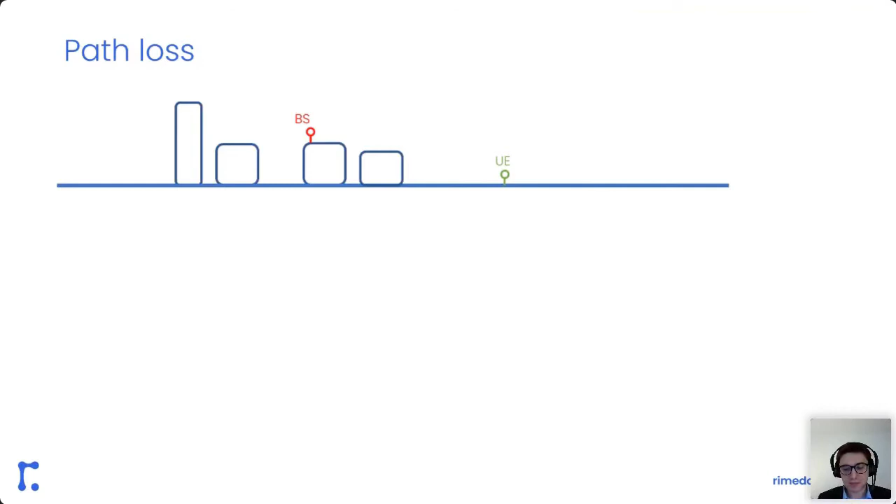Now I would also like to introduce path loss, since maybe not everybody is deeply in the field, and this is pretty important in my talk. So if we consider a base station mounted somewhere and a mobile station, which is user equipment, UE here, then the path loss is simply the difference between the transmitted power and the received power. So it means how much power is lost in the air in the transmission between the transmit antenna and receive antenna. This is the path loss.

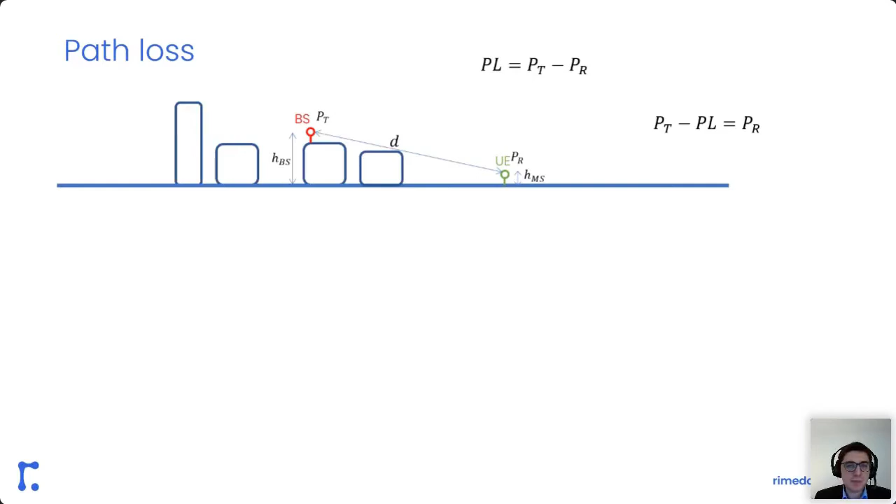And this is important because if you design the network, if you want to check the coverage, or if you want to check the quality of the link for the users, you have to know the transmitted power, and if you know the path loss, then you can simply determine the received power, which is crucial for users.

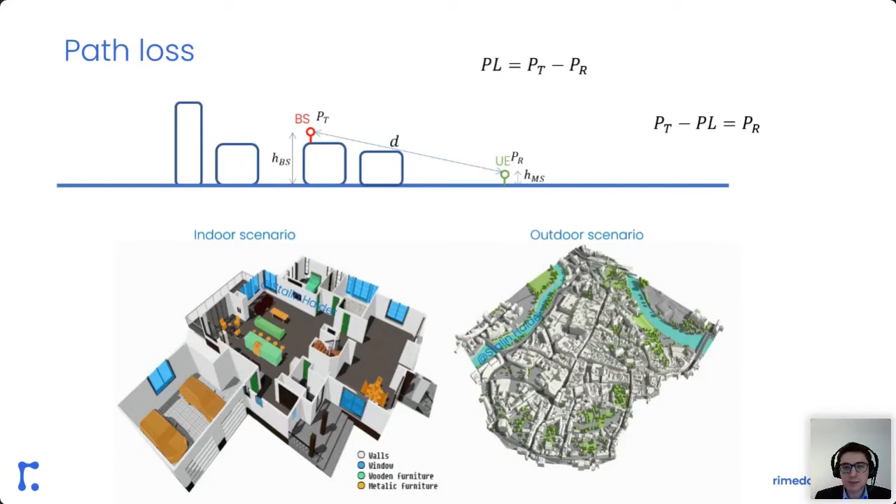And mainly in every case, also in the millimeter wave case, in wireless propagation we have indoor scenario and outdoor scenario. We have also a mixed scenario, which is called outdoor to indoor. In my talk, I will focus on the outdoor scenario in my simulations.

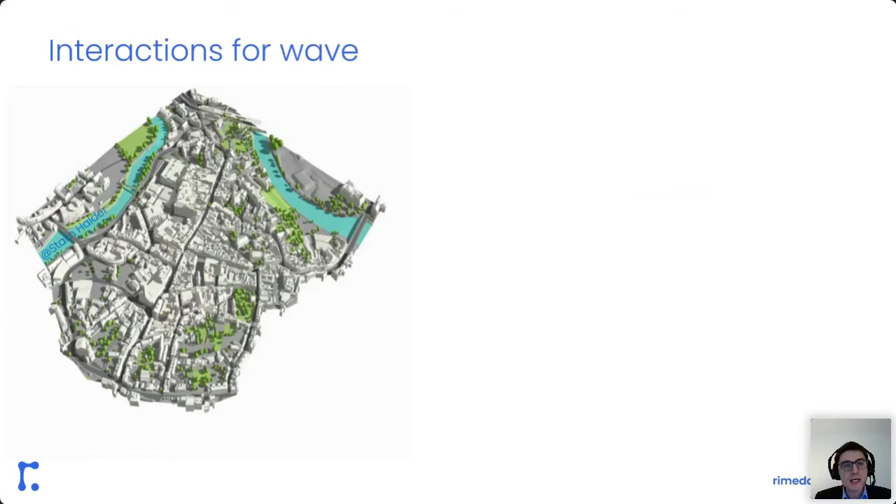So if we consider the base station mounted somewhere in the city, as you could see in the left side of the screen, then you just launch the power, you just transmit the wave. Then you have simply 4 possible interactions for every wave. And the first is the free space propagation, where we have direct transmission between the base station and the user.

Second, we have the reflection and transmission case, where the signal touches the wall, touches the obstacle, the building, and some of the power is reflected and some of the power is transmitted into the building. We call it then the penetration loss or reflection loss.

Third, we also could have the diffraction case, where the signal goes through the wedge, either vertical or horizontal, and then the signal can bend in the wedge, and also some power is lost in that case. However, this is pretty nice, since users which are shadowed, which are not present in the line of sight case, could also be served.

Finally, fourth, we have also scattering, which is the reflection with an angle different from the incident angle. So this could be understood as the case that the wave is coming to the surface, and then because of the surface roughness, it is scattered in another direction, with another scattering angle, and we call it diffuse scattering.

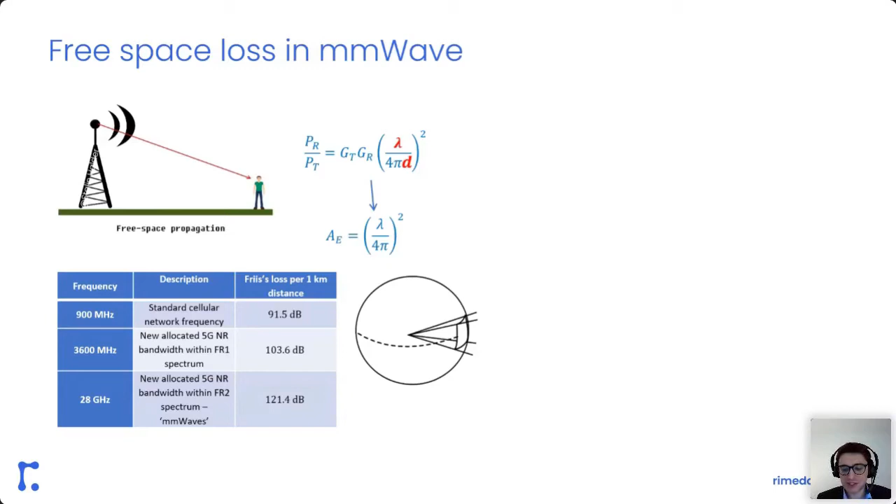And you can see the more elements in the antenna array we use for beamforming, the more narrow the beam is, which means it has greater directivity, which means the user at a given distance will collect a greater amount of power.

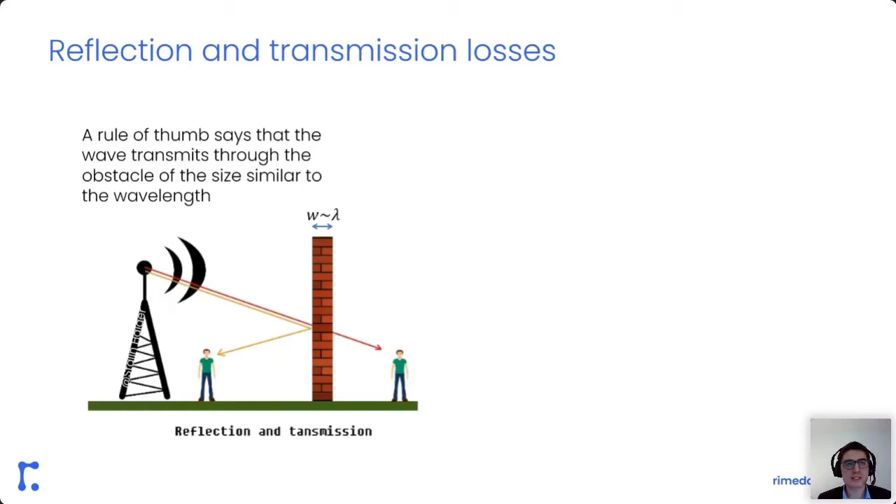Of course, it doesn't mean that if you compare, for example, a 6 gigahertz wave, where lambda is around 5 centimeters, and you transmit through a wall with a width of 5.1 centimeters, then it is blocked, but if the wall is 4.9 centimeters, it goes easily. Of course, it is smoother. However, the rule exists. And if we compare the reflection losses regarding the frequency and also the transmission losses, we could observe the frequency dependence here.

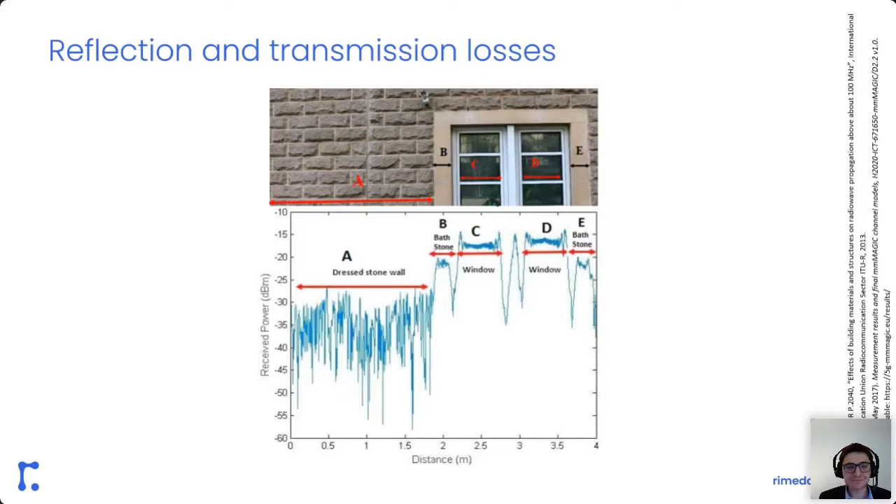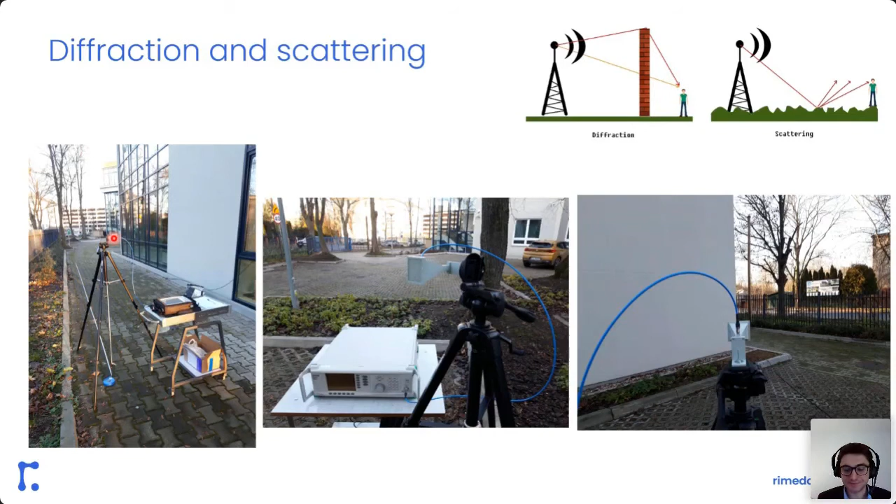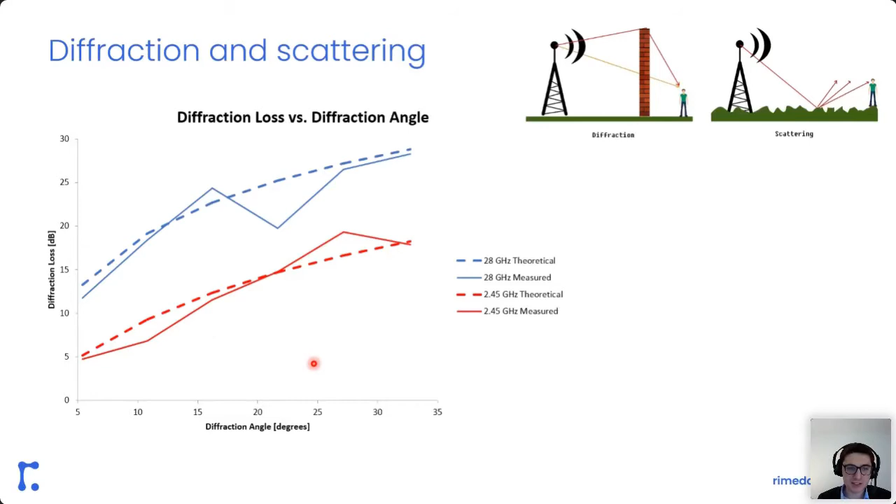However, still, this diffraction loss is not killing propagation in millimeter wave. It is bigger than in sub 6 gigahertz, but it is not killing the case. And just to sum up diffraction, we have a 10 decibel difference. We could model this with a couple of methods. The Deygout method is the theoretical method for diffraction modeling. We also have the quite popular Berg iterative model and the quite detailed, precise UTD, GTD model.

And scattering, which is of great importance in millimeter wave: we shall consider the Rayleigh criterion for surface roughness, since with a millimeter wavelength, a couple of millimeters, we compare the wavelength of the wave with the roughness of the surface. And if they are of similar size, then scattering plays the main role here.

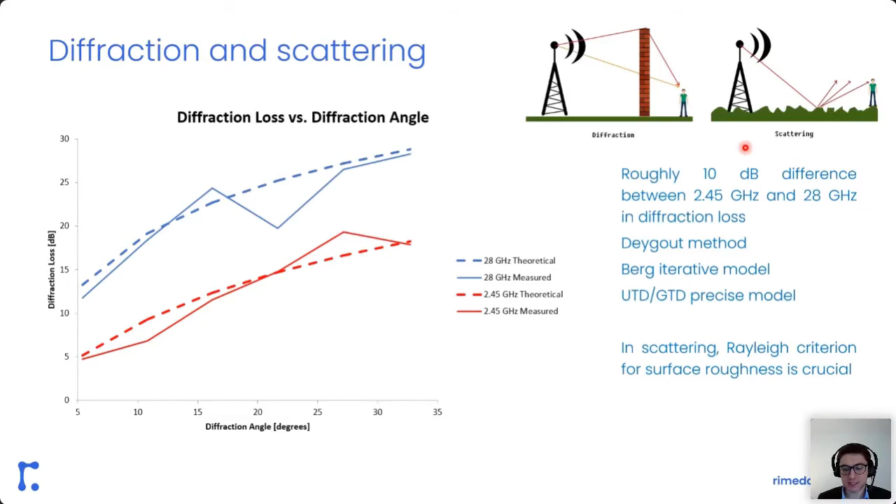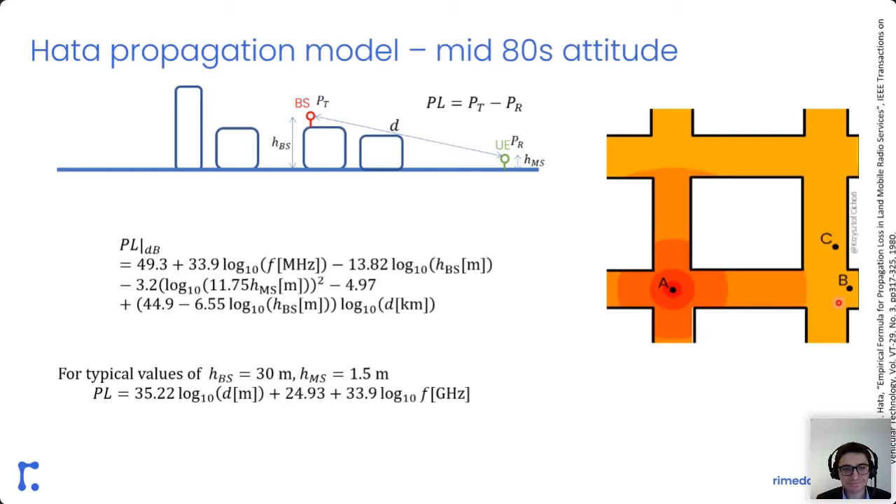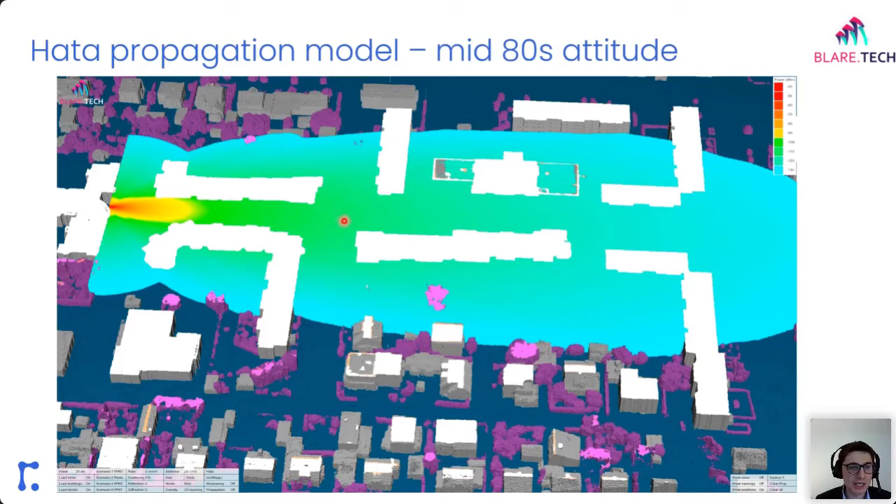And this is the simulation result for our small city in northern Poland, you could remember, according to the HATA model. So irrespective of where we are, if we are in the shadow of the building or in the line of sight, the path loss is similar. And of course, the measurements say the opposite. That can't be true. If you are in the line of sight, the red line, probably your wireless situation is much better than if you are in the non-line of sight.

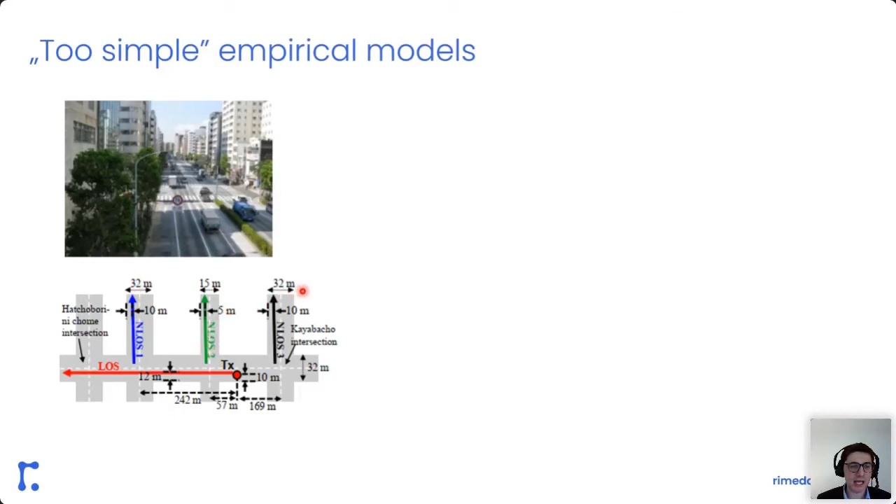Here, the measurements were conducted in 3 streets: the blue, green, and black one. And here are the results. The source is the METIS final report, a really nice document. And here you have the measurements and theoretical lines for 6 frequencies. I think the most interesting for us is 26 gigahertz, case E, where you have line of sight path loss given in red. Red circles are the measurement points, and the red solid line is the theoretical line.

So in the line of sight case here, the path loss is above 100 decibel. For example, at 200 meters, it is around 105 or 110 decibel. However, in the non-line of sight cases, it is much worse. It depends on the street. It could be even 140 or 150 decibel. And this difference between the line of sight case and non-line of sight case exists in every case, irrespective of the frequency.

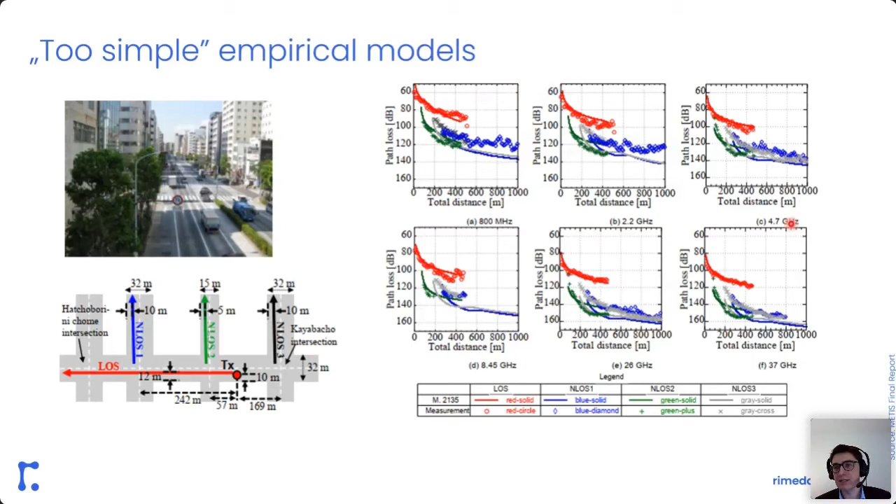So, why not distinguish in the propagation model these 2 cases, line of sight and non-line of sight? And this is the class of LOS and NLOS-aware empirical models, where you have to know if the user is in the line of sight case or non-line of sight case, and then you have 2 formulas. And distance dependence is different in these 2 cases. Line of sight, of course, is more optimistic.

And our simplified scenario with base station mounted in point A and locations of users in points B and C. Now their situation is much different. If user C is in the non-line of sight case, so it's simply shadowed by the building, then the path loss here is much greater. However, user B is in the line of sight case, so his attenuation is lower, path loss is smaller. And this is the comparison to the previous obsolete HATA model.

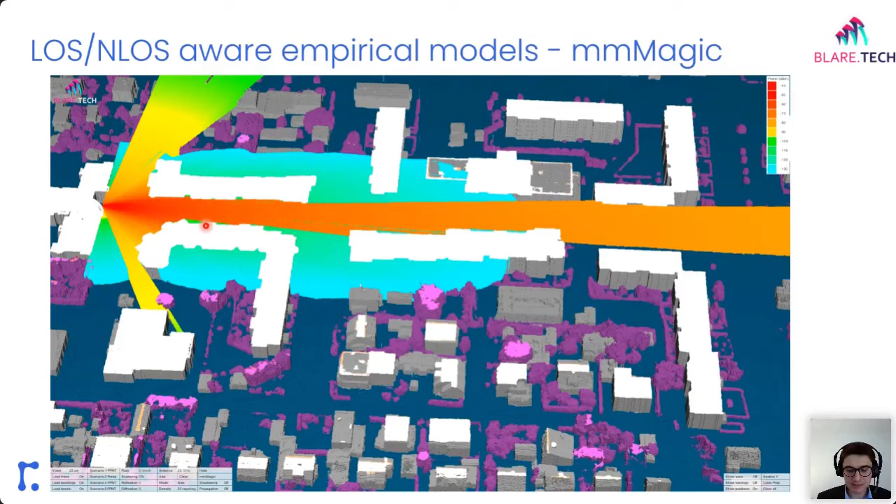Here, this part of the results is related to the building, because the antenna is hidden a little bit in the building. That's why here we have a non-line of sight case. And the comparison between these 2 simulation results is the following.

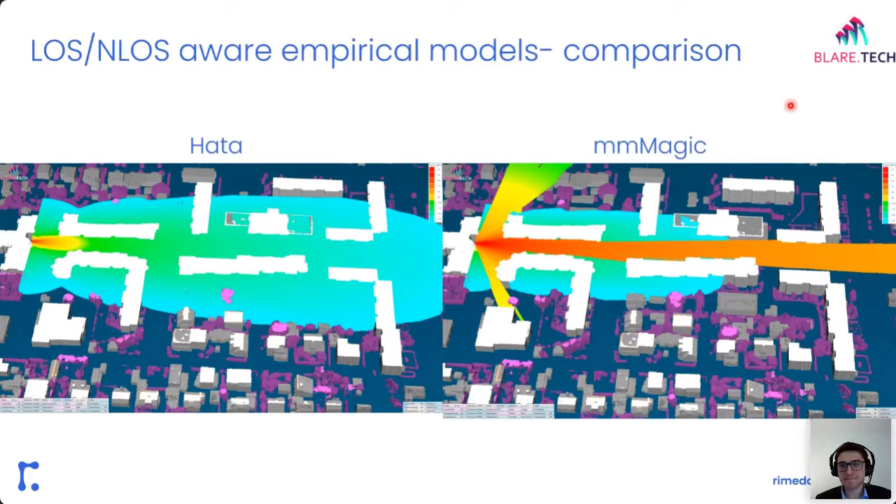The mmMagic, of course, is much more practical. The third class of modeling, so the first was the empirical obsolete HATA model, the second the line of sight, non-line of sight aware model. The third class is ray traced or ray launched modeling, which involves, of course, the digital scene of the city, a digital map of the area.

However, in the ray launching, you just launch the rays from the transmit antenna, and the alpha parameter, the density of rays, is crucial, since the greater the density in the engine is, the greater accuracy of results is given, of course, at the cost of calculation complexity. And the environment resolution also is pretty important here.

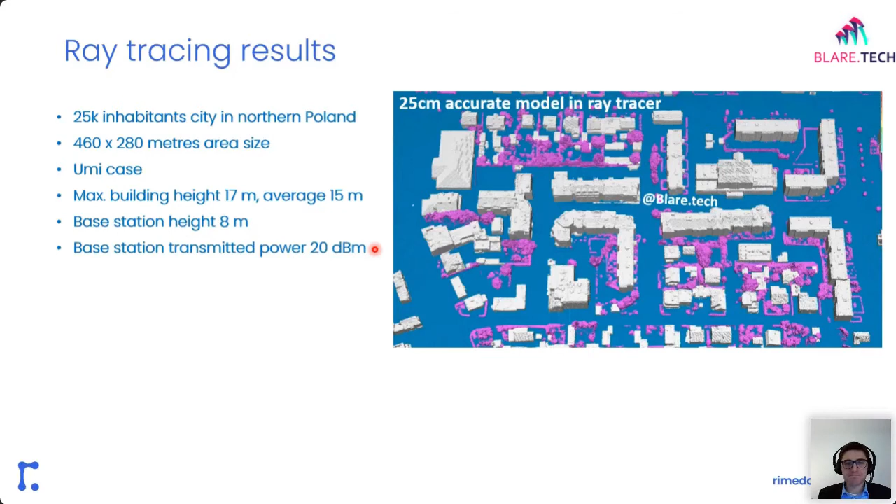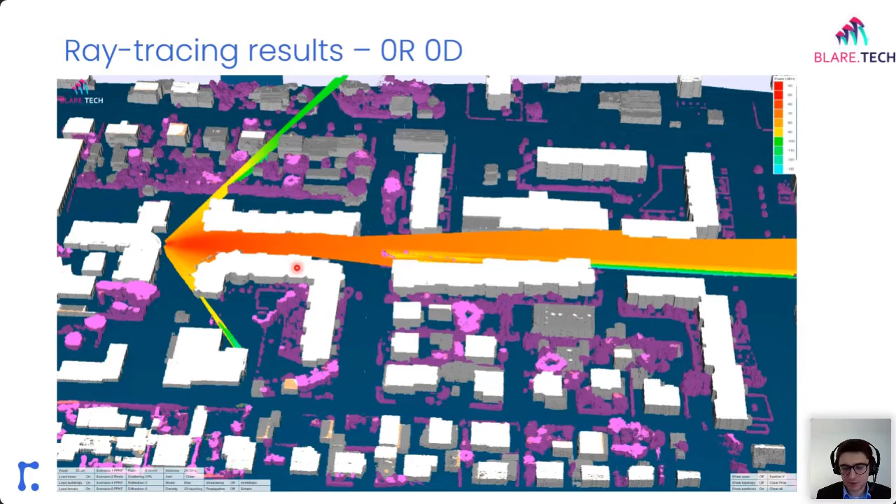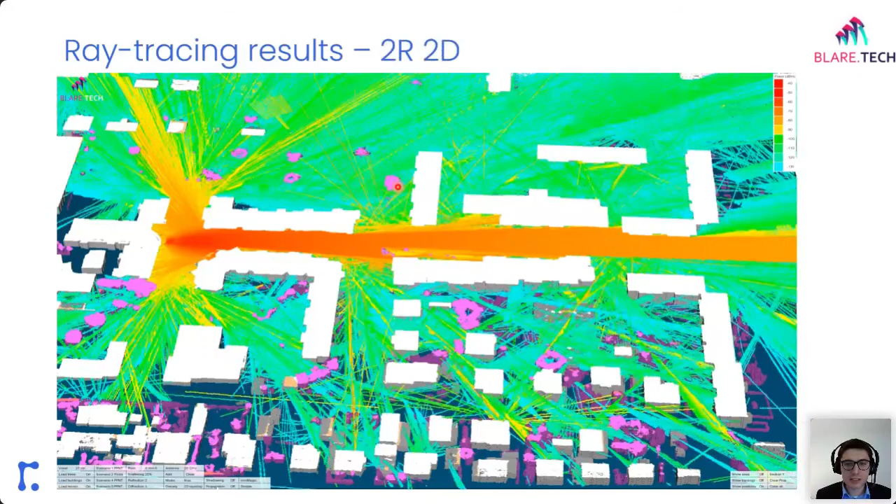If we increase the reflections and diffractions by 1, then we have the following scene. So it looks much better: if the user is in non-line of sight, he or she can collect much power, especially close to the antenna. Then if we move to 2 reflections and 2 diffractions, the rays are much denser, and 3 reflections and 3 diffractions give us an even greater boost in the number of rays. We can see that the coverage is right now quite nice.

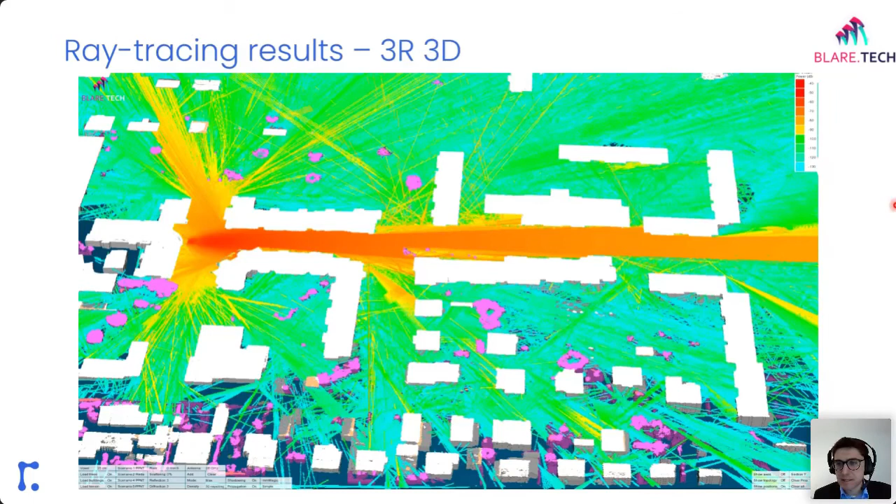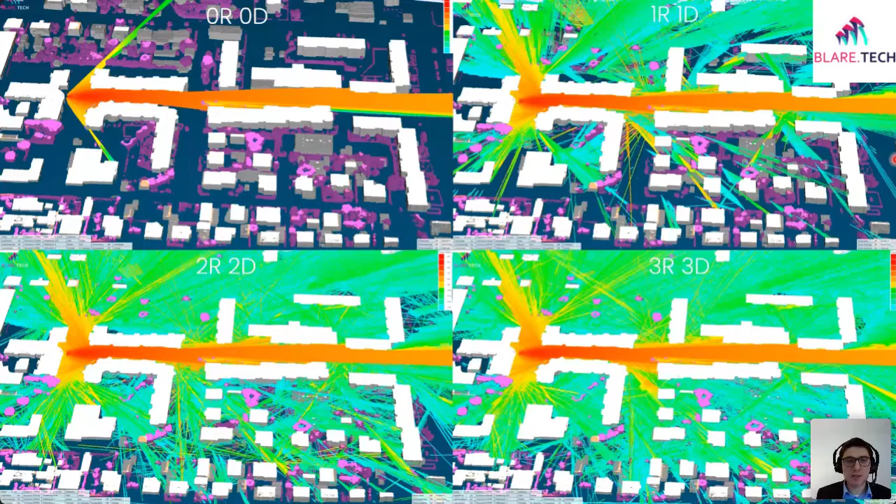So all cases together, let's compare them. Of course, the more interactions we use, the more reflections or diffractions we use, the greater accuracy of the scene. All right. So this is ray tracing, ray launching results for detailed network planning. And now a few words about millimeter wave adjustments.

First, rain or snow. Now we have snow, at least in my country right now, which is becoming more and more unusual. So if we have rain of, for example, 100 millimeters per hour, this is really heavy rain. And if we consider the frequency of, for example, 30 gigahertz, then the attenuation is around 20 decibels per kilometer, which means 2 decibels per 100 meters or 4 per 200 meters. So it becomes a significant value when we want to find a link budget. Then we shall also include the possibility of rain attenuation.

Of course, rain or snow is quite important for direct links in millimeter wave, since these frequencies are in current use in backhaul links, not only in 5G but also in previous systems. The backhaul direct links, when we have two antennas with great directivity, and the operators find the link between one base station and the other and send all of the traffic from one base station to the other, for example, a central base station. So that's quite important there. Here it is not of so great importance, however, it becomes visible.

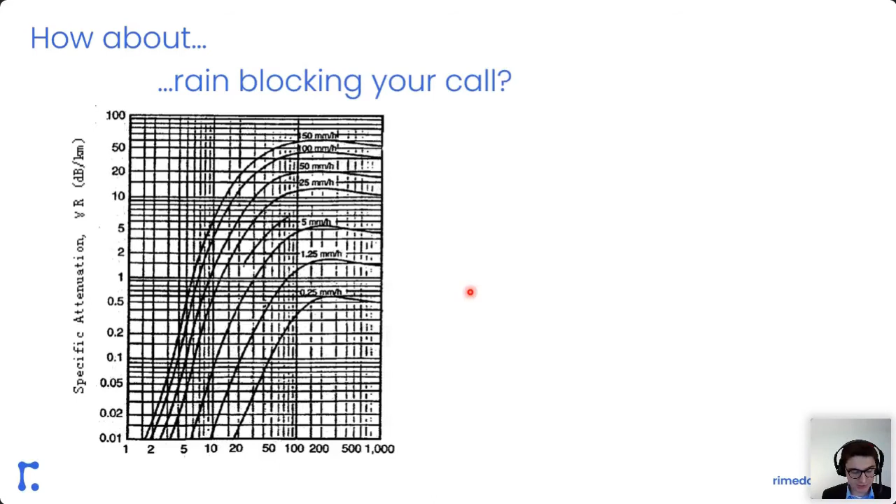And if we compare these 2 decibels per 100 meters to 3.6 gigahertz, the attenuation there is only 0.03 decibels per kilometer. So it is completely invisible for operators and users. Also, gas attenuation becomes visible in millimeter wave. Fortunately, for 30 gigahertz it is really low. It becomes well visible at higher frequencies.

By the way, the predictions are that in future systems, including 6G, which is now in research, we will use higher frequencies than 28 or 30 gigahertz. So probably this is the time to touch this topic. If you look at 28 gigahertz, the attenuation is 0.05 decibels per kilometer. However, for 60 gigahertz, it is 20 decibels per kilometer, so it's still quite a lot.

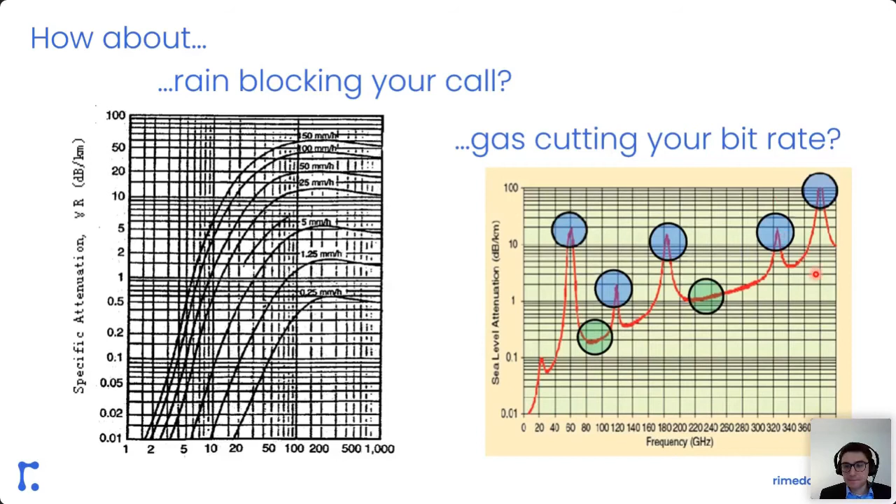And foliage attenuation. Probably you remember today I mentioned that a rule of thumb says that the wavelength should be compared with the obstacle width, and if the wavelength is of a similar size to the obstacle, then we have greater attenuation. So it is also related to the foliage. If our wavelength is 1 millimeter or 10 millimeters, which is 1 centimeter, then the foliage, which is quite often of that size, starts blocking millimeter wave.

And in the ITU recommendation P.833, you can find that in woodland for 2 gigahertz, the attenuation is 0.4 decibel per meter. However, for 30 gigahertz, the attenuation is equal to 6 decibel per meter. So it's not a mild scatterer as it was for the sub 6 gigahertz cases. Now in millimeter wave, it is pretty important to include foliage into the simulation.

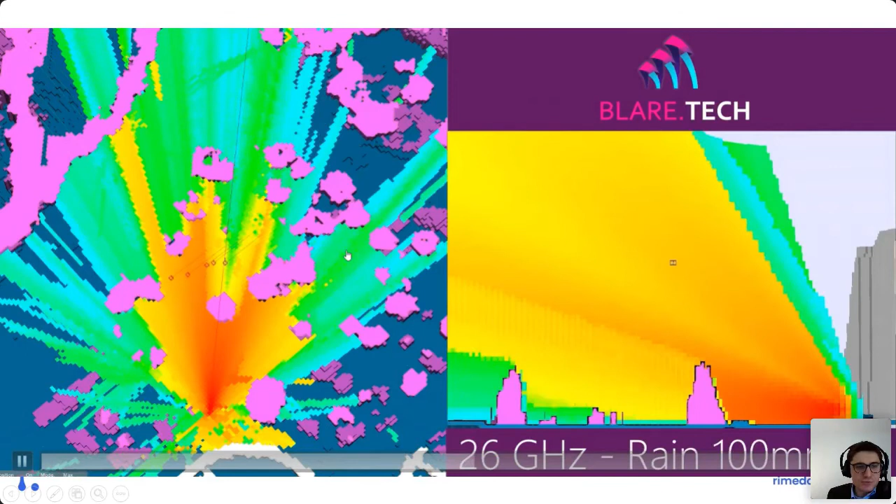So now we have 3.5 gigahertz. Now 3.5 with rain, the difference is not very significant. Now we move into 26. You can see greater attenuation because of foliage. And with rain, it is also a little bit slower. I mean, attenuation is greater. And finally, 64 gigahertz, the coverage is really limited. If the rain comes into play, it is even more limited. So that's the film.

And the final topic is AI-based channel modeling. Here I would like to put only a few thoughts in the field, since artificial intelligence and machine learning are coming to the wireless field also, to network planning also. So a few things. First, about the application in the wireless field. So in principle, machine learning or artificial intelligence is inferring based on data. If you have data, the more precise and clean the data, the better. Then based on the data, you just infer how the system works.

But in reality, in the wireless field, we quite often have nice models. We could model how the wave interacts. We could model exactly the working of the whole engine, the working of the field. And the AI here may significantly reduce the complexity, computational complexity. And this is probably the main point here.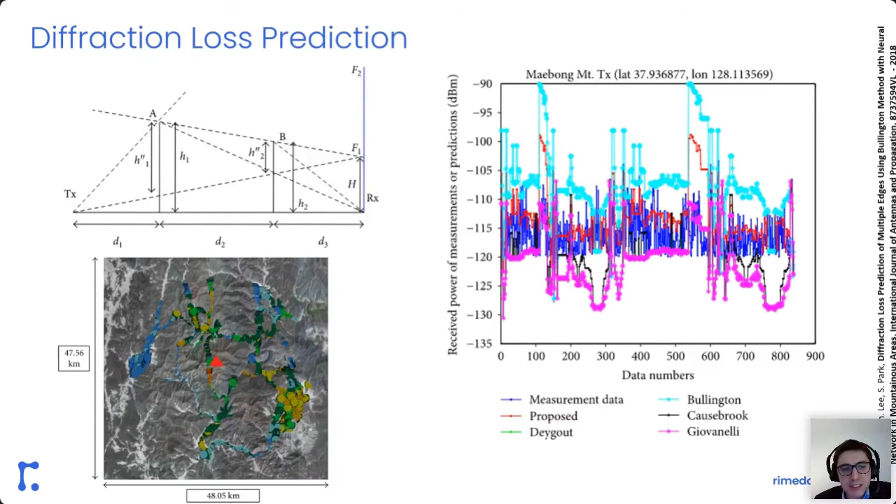And here there are 6 colors in the plot. So the main one is the blue, which is the measurement data. You can see that it changes greatly. And the proposed neural network based solution is the red curve. And their error was around 3 or 4 decibels when compared to the other methods. For the theoretical one, the error was 6-7 decibels. And this is one of the examples of how deep learning can simply work in the field.

The second one is given by my student, Supavat Tamsri, who is quite a talented guy. He built a 3D scene of, by the way, the old market square in Poznań, and he built the stage. And he learned a model. He used ray tracing here with diffraction and reflections also. And based on the results of the diffraction and the reflection, he found the path loss in different cases. And then he applied the gradient ascent method with Adam optimizer. And then he planned the small base stations in this area.

Now I hope it works. Okay.

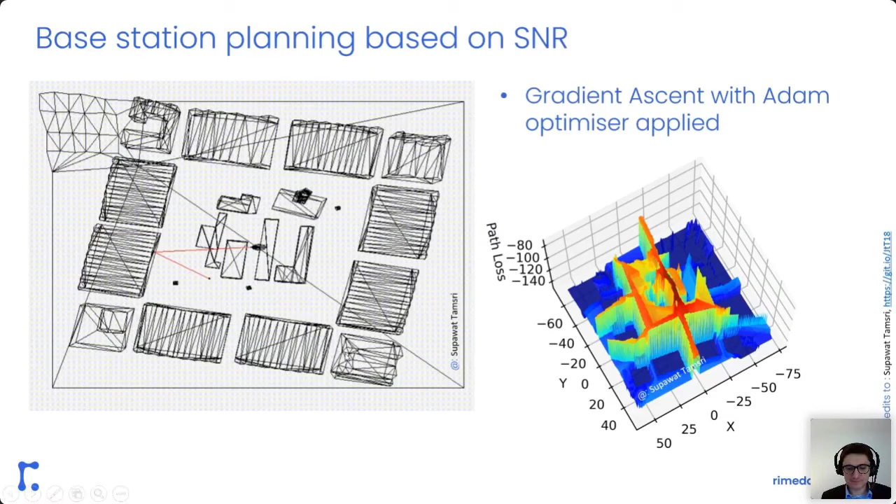So based on the random set of users, blue dots, and based on their link qualities, which is related to the propagation, he found the locations of base stations, small cells. They are the red ones. And this is the example of how the algorithm looks for the best solution, the best location of base station. This is based mainly on the line of sight case. The non-line of sight case is under further stage, and you can find his work in this link and read more details.

So just to sum up, honestly speaking, this algorithm here is not AI, in principle, since there was no data, measurement data or other data, for learning and finding the positions of the base station.

That was the enhanced optimization problem where there were many iterations with the gradient ascent method, which is probably one of the well-known methods in the machine learning field. And that's the case that with these optimization methods, machine learning tools and AI tools, we can faster get best or close to best solutions. And this is a new tool in our field. And I think that now it's the time to learn this new tool, which is simply used for solving problems.

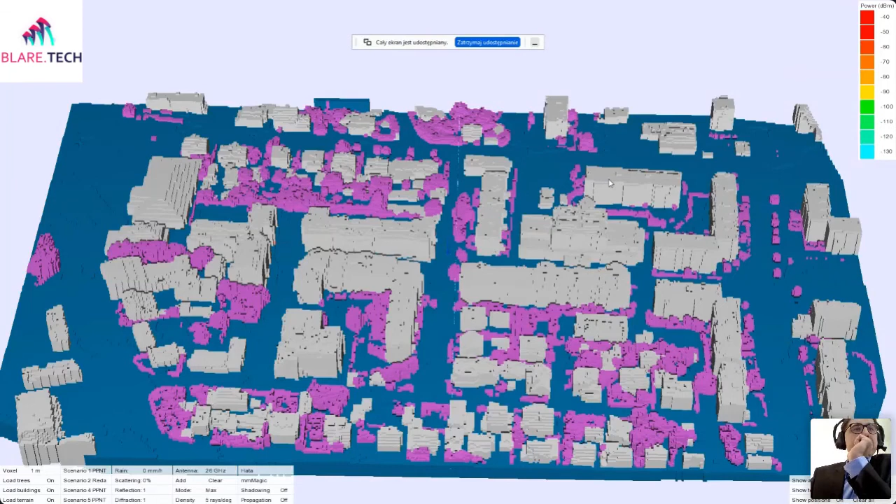I would like to show it because I have real-time working modeling right now, so I could just open the tool and show it. Now you should see the scene. Can you see the scene? Yes. All right, so this is the same scene as I showed in the presentation. So right now you can see the foliage and buildings, and let me launch the reflection 1, and maybe start with the reflection 0, diffraction 0 case. Let me start the propagation.

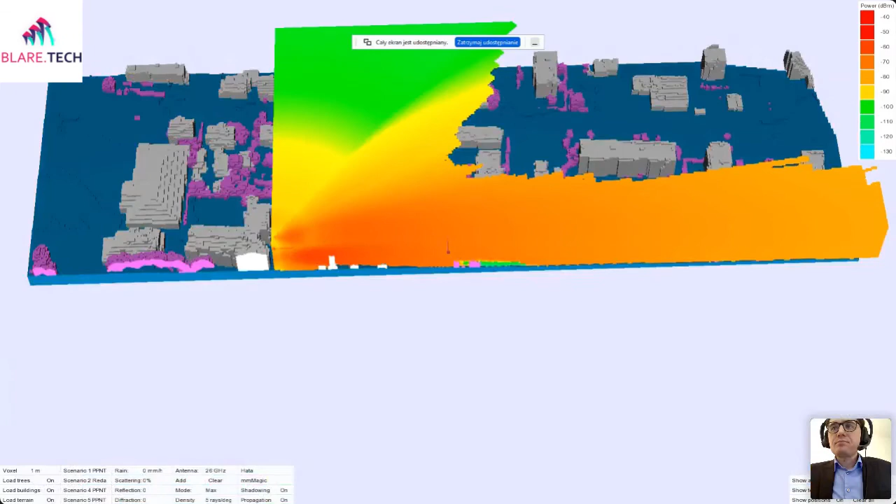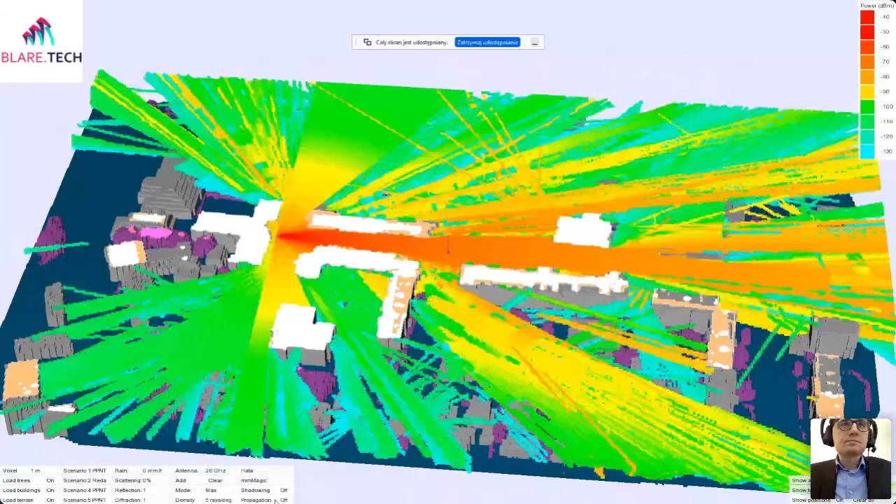So this is the result. We could cut the scene in various directions. So this is the result of the single reflection, single diffraction. We could go up, and down, and then reflection 1, diffraction 1. So these are the results. This is launched on my notebook, and it is given in real time. You can see here the number of rays found. Right now we have 1.5 million rays. And then we have reflection 2 and diffraction 2.

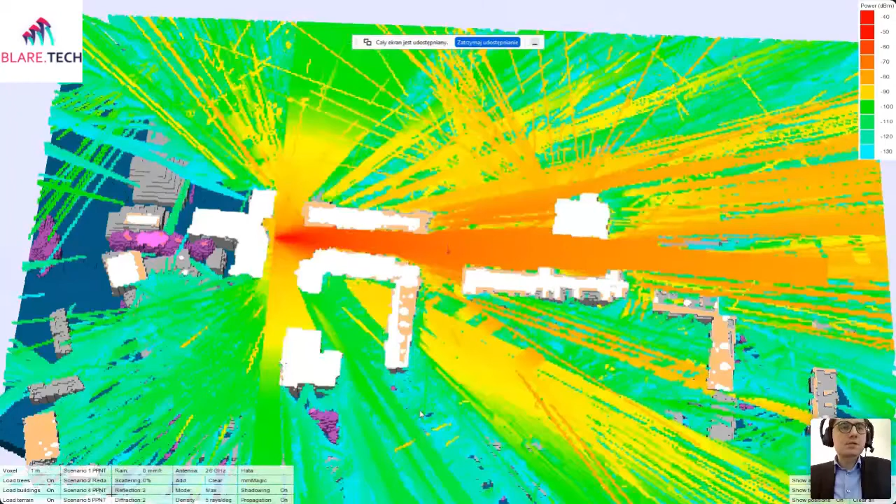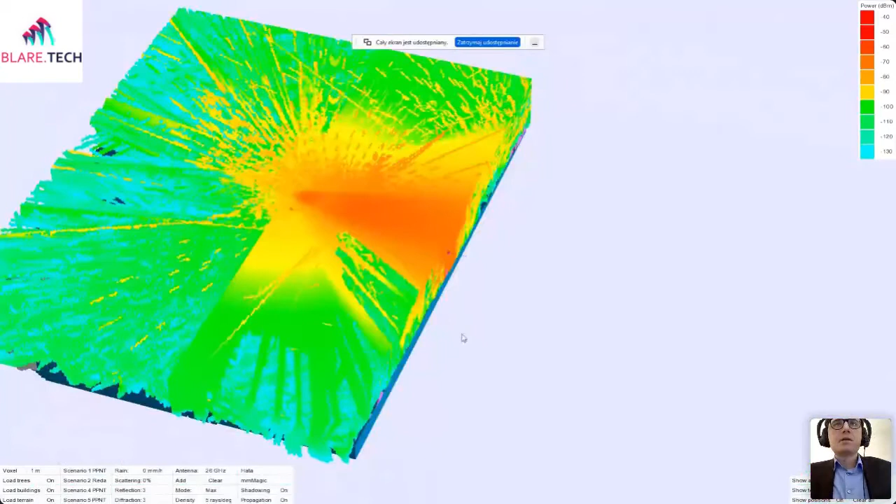Maybe once again. Right now, yes, it is here. So these are 2 reflections, 2 diffractions. Then let's move to 3 reflections, 3 diffractions. So clear, and now launch the simulation. And now you can see the results. If you want to cut it.

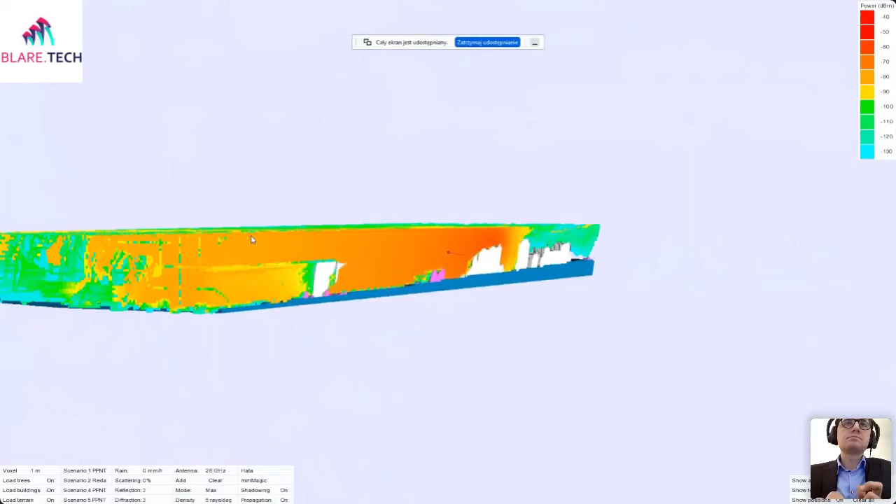Chris, when you change the parameters, it seems to generate the model on screen very quickly. Is this a special computer? Is it a very strong processor, a lot of memory, or is it just very efficient at computing the result? Well, this is a notebook with the graphic card, and this processor here is probably i7, so it is rather strong. However, it is not top. This is quite mid-strong, and it is calculated in real time.

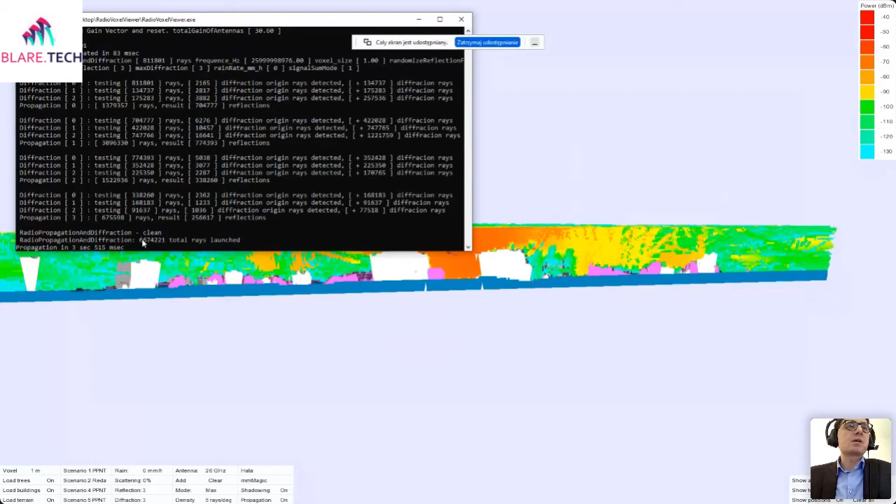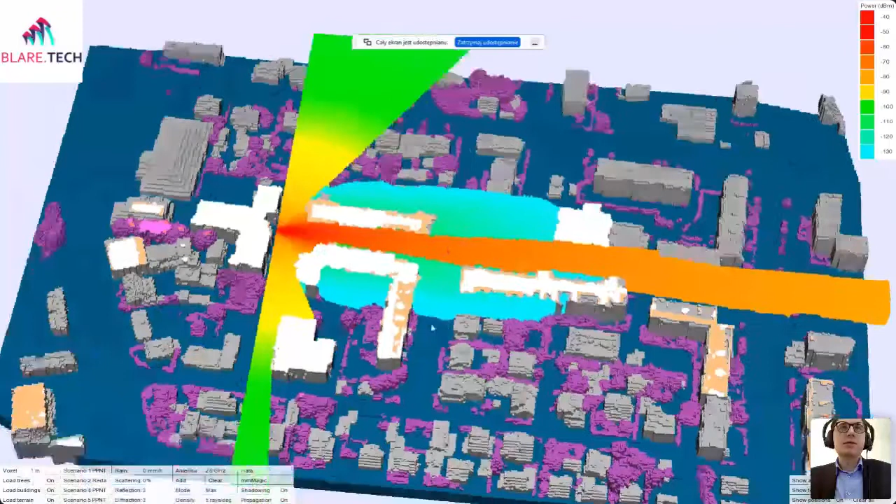Here you can see, for example, for 3 diffractions and 3 reflections, you had 3.5 seconds, and you have 6 million rays found. I'm very impressed by that. That's really terrific. So here is the scene, and of course also we can find the simpler models like mmMagic. They are pretty fast. So these are the results which I showed you in the presentation. So I am also impressed.

By the way. All right. So that's what I wanted to show right now. Okay. So thank you very much.

Wow, tremendous. Do you have a little time to consider some of the questions from the attendees? Yes, we can go with some questions, of course. Okay, so I'm going to go back here, and some of them are flagged. Well, so many comments here, yeah. Let's see. The students themselves are also able to flag the questions, and not all of them have been filtered. So, and I've lost the ones that I had. There was a question though.

Can you say a little bit more about the modeling software, the Blare.tech software? There was a question about free software for doing ray tracing. Is the Blare.tech in the public domain, or is it a commercial product from Blare.tech? Well, this is the question. So it is not released commercially so far. However, as you could see, the stage of the software right now is quite mature. So I guess it will be released in the future. So it is not available in the public domain. However, I guess that in a couple of weeks there will be a kind of release or a webinar or some information related to this.